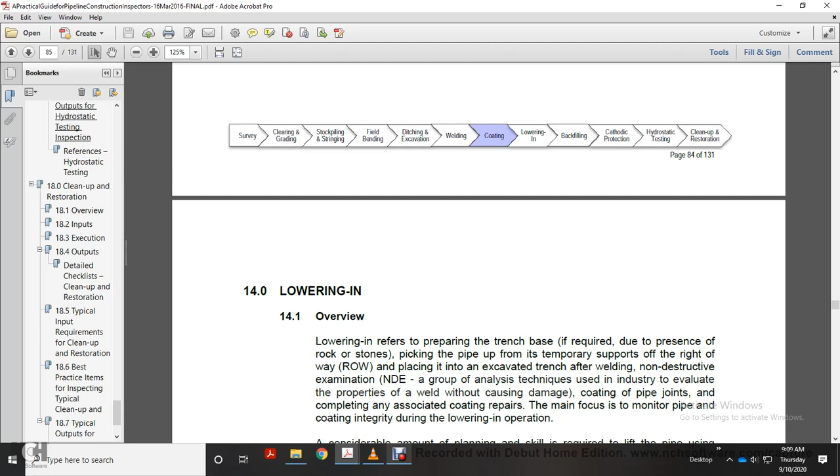Chapter 14, Lowering In. Practical Guide for Pipeline Construction Inspectors.

Overview: Lowering in refers to preparing the trench base if required, picking up the pipe from its temporary supports off the right of way, placing it into an excavated trench after welding.

Non-destructive examination is a group of analysis techniques used in industry to evaluate properties of the weld without causing damage. Coating of the pipe joints includes completing any associated coating repairs, with a main focus on monitoring pipe coating integrity during the lowering operation.

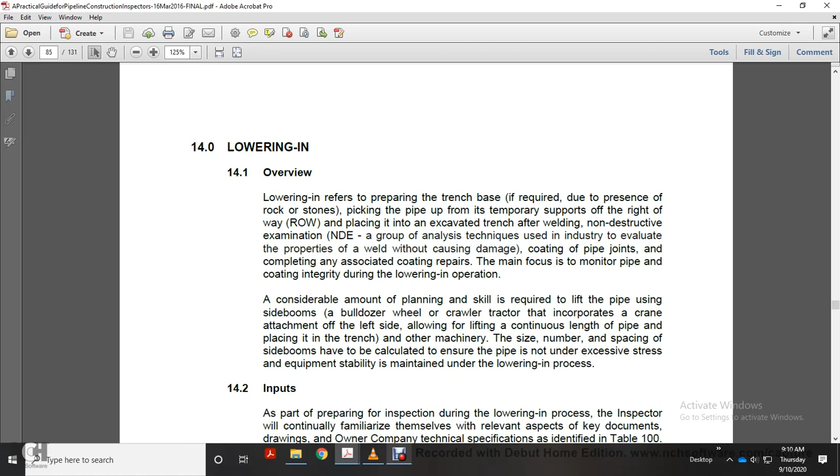Consider the amount of planning and skill required to lift the pipe using side booms. A bulldozer wheel or crawler tractor incorporates a crane attachment on the side, allowing lifting of a continuous length of pipe and placing it in the trench. Other machinery size, number, and spacing of the side booms have been calculated to ensure the pipe does not undergo excessive stress, and equipment stability is maintained during the lowering process.

14.2: As part of the preparation for inspection during the lowering in process, the inspector will continue to familiarize himself with the relevant aspects of the key documents, drawings, and owner company technical specifications identified in Table 100.

Execution: While work is being executed, the inspector is required to monitor workmanship and report on progress on a periodic basis. Typical items the inspector will monitor during the lowering process are identified in a series of checklists, Table 99.

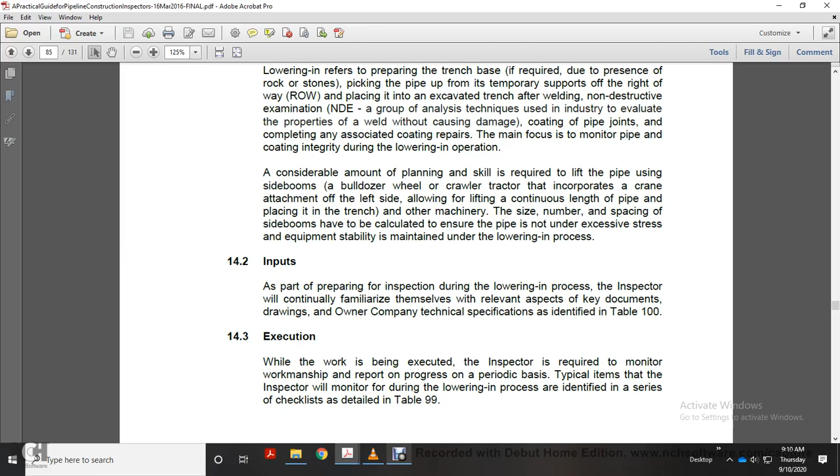Table 99: Monitoring Requirements for Lowering In. Prior to commencement, on a daily basis, ensure the key issues have been identified and addressed in detail.

Safety: monitor operational adherence relevant to the owner company's project-specific safety requirements. Environmental considerations: identify specific items that should be monitored for the lowering in operation, relating to specific owner company project-specific environmental protection plans. Trench base preparation.

Prepare the trench base to ensure the pipe is not damaged when placed into the ditch due to rock, construction debris, or other hazardous trench bottom conditions.

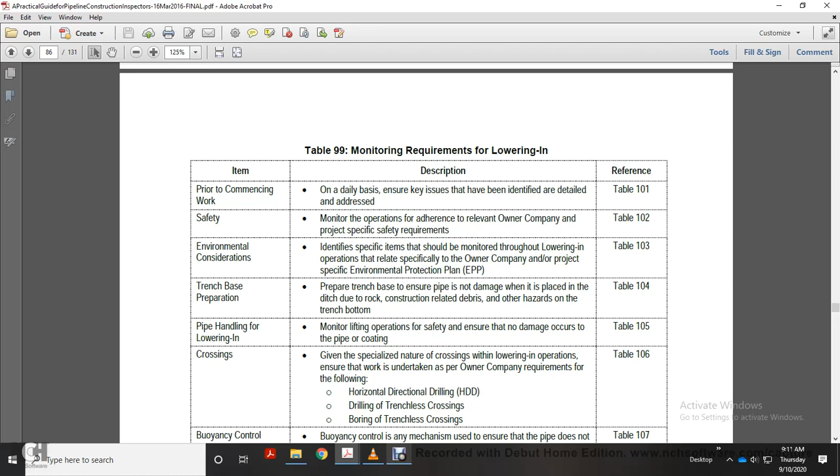Pipe handling and lowering in: monitor the lifting operation for safety, ensuring that no damage occurs to the piping or the coating.

Crossings: given the specialized nature of crossing lowering in operations, ensure work is undertaken per owner company requirements for horizontal directional drilling, trenchless crossings, and boring of trenchless crossings.

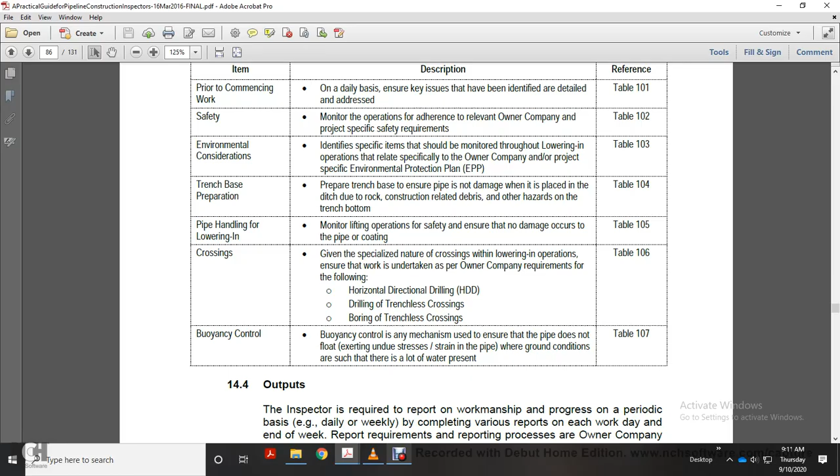Buoyancy control: buoyancy control refers to any mechanism or measure used to ensure the pipe does not float, exerting undue stress or strain, where ground conditions are such that there is a lot of water present.

14.4 Output: Inspectors are required to report workmanship progress on a periodic basis by completing various reports at each work day and at the end of the week.

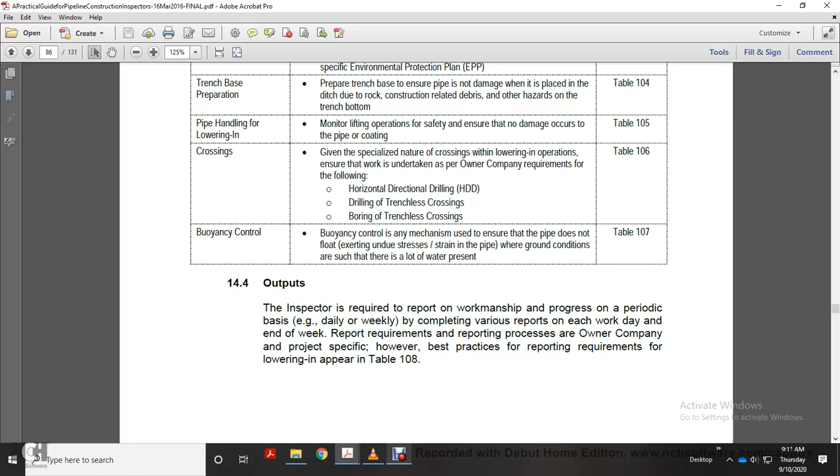Reporting requirements and the reporting process are owner company project-specific. However, the best practices reporting requirements for lowering in appear in Table 108.

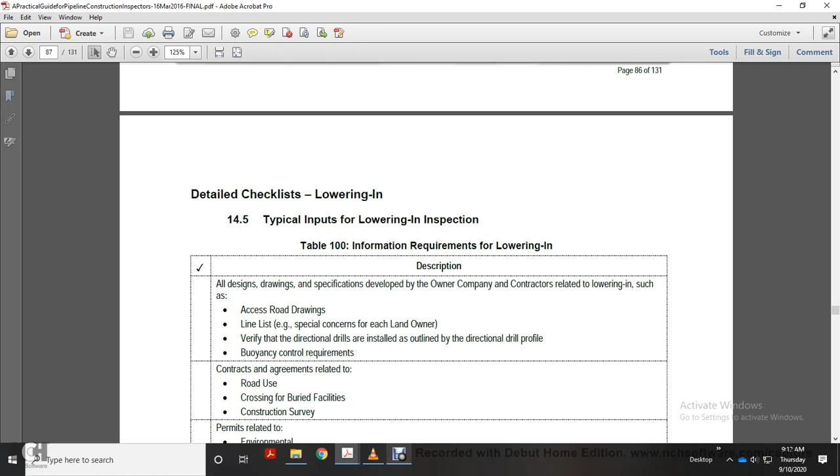Table 100: Information Requirements for Lowering In. All design drawings and specifications developed by the owner company and contractors related to lowering in, such as access road drawings, line lists, verified direction drill installation outlines with direction drill profile, and buoyancy control requirements.

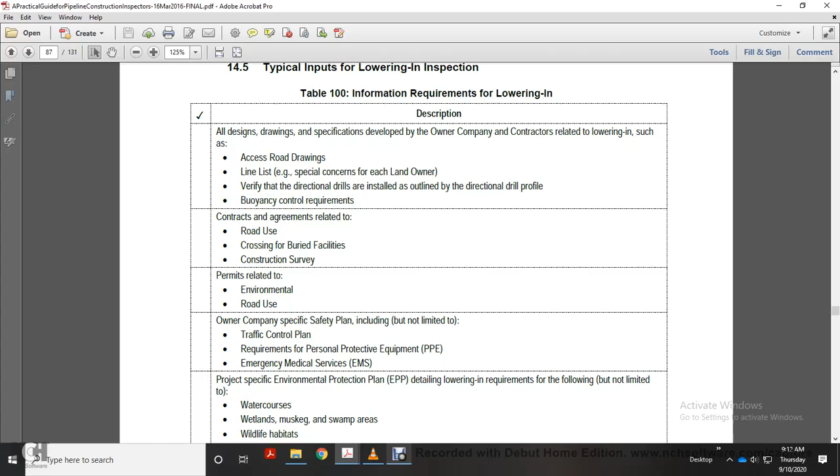Contracts and agreements related to road use, crossings, buried facility construction surveys, and permits related to environmental and road use. Owner company safety plans include but are not limited to traffic plan requirements, personal protective equipment, and emergency medical services. Project environmental protection plans detail lowering in requirements for, but not limited to, watercourses, wetlands, muskeg, swamp areas, wildlife habitats, and migratory routes.

Other project-specific plans may include fire prevention and fire fighting. The lowering plan identifies the type and number of lifting and hoisting equipment required, and the number and specific roles of workers to be on site to lower the pipe into the trench, including the lift plan, relevant contingency plan, and return of HDD.

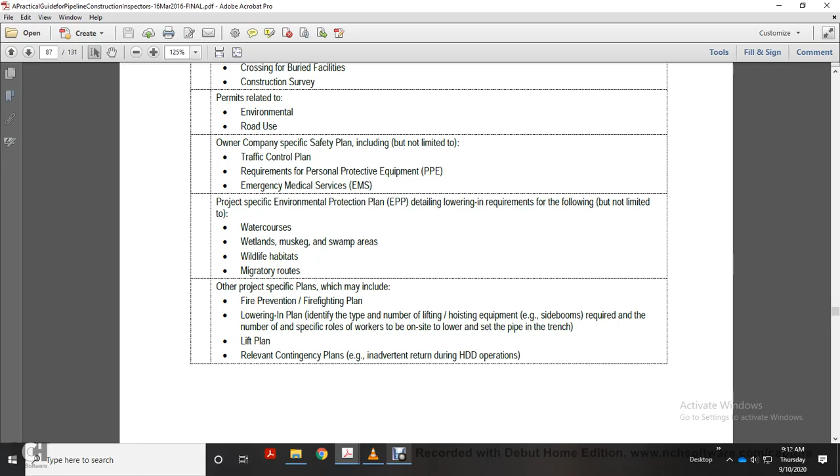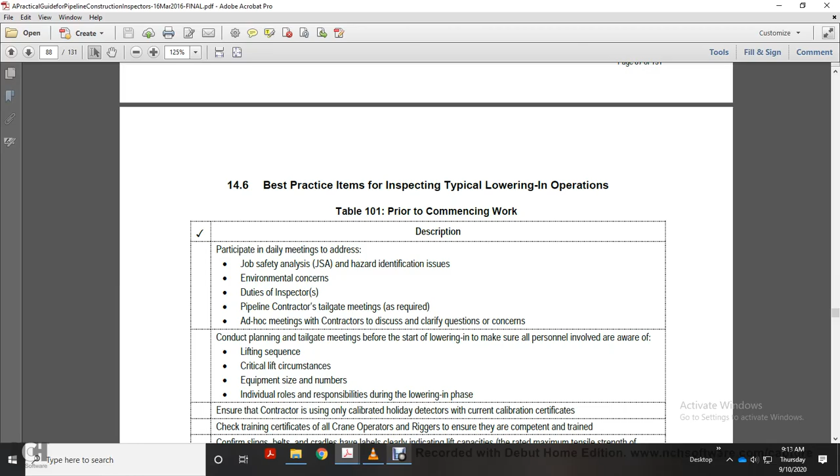Operations: prior to commencement of work, participate in daily meetings covering job safety analysis, hazard mitigation, and environmental concerns. Duties include inspector and pipeline contractor tailgate meetings as required, ad hoc meetings where contractors discuss and clarify questions and concerns, and conducting planning or tailgate meetings before starting lowering in, making sure all personnel involved are aware of the lifting sequence, critical lifting circumstances, quantity, and individual roles and responsibilities.

During the lowering phase, ensure contractors only use calibrated holiday detectors with current calibration certificates, and check training certificates with all crane operators and riggers to ensure that they are competent and trained.

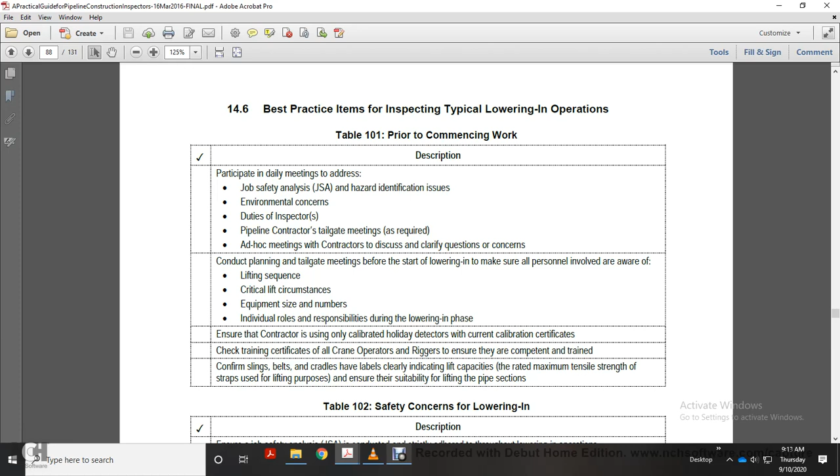Confirm slings, belts, and cradles have been labeled clearly, indicating lifting capacities related to maximum tensile strength. Straps used for lifting purposes must ensure suitability for lifting the pipe section.

Table 102, Safety Concerns, Lowering In. Ensure job safety analysis is conducted and strictly adhered to throughout the lowering-in operation, and updated as required.

Ensure side boom operators use spotters when traversing under power lines due to overhead hazard. Ensure no personnel are ever allowed between the pipe and the trench wall, which could result in a pinch point safety hazard.

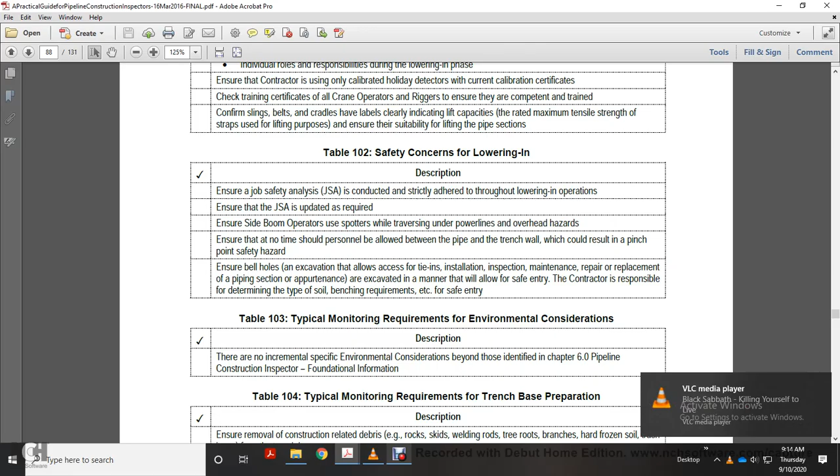Ensure bell holes for tie-ins, installation, inspection, maintenance, repair, and replacement of piping sections are excavated in a manner that allows safe entry. Contractors are responsible for determining soil type, bench requirements, and other factors for safe entry.

Table 103, typical monitoring requirements, environmental consideration. No incremental specific environmental considerations, beyond those identified in Chapter 6.0 of the Pipeline Construction Inspector Foundational Information.

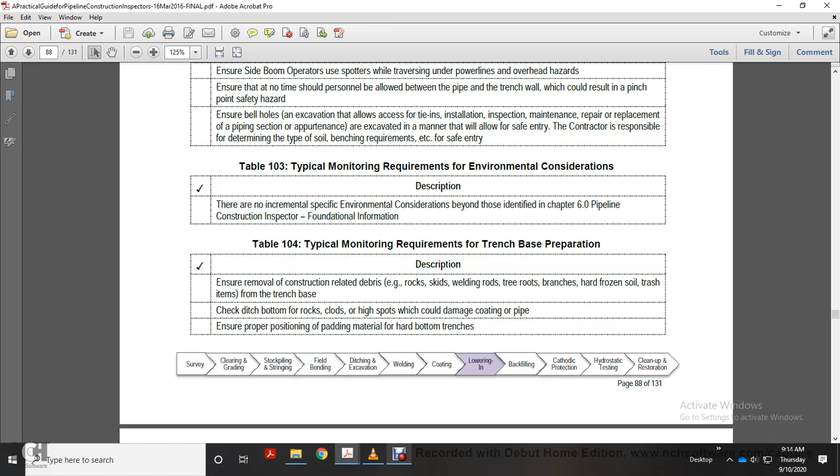Table 104, typical monitoring requirements, trench base preparation. Ensure removal of construction-related debris: rock, skid, welding rods, tree roots, branches, hard frozen soil, trench trash, items from the trench base. Check ditch bottom for rocks, clods, high spots that could damage the pipe coating. Ensure proper padding material is positioned for hard bottom trenches.

Ensure contractor refers to contract documents appropriate to drawing specifications and proceeds with padding and support material to shore up the underside of the pipe properly with distributed loading, typically sand or foam pillows. Ensure adequate spacing between paddings so they do not split or overly compress, maintaining specified padding thickness.

Ensure foam boxes are installed in accordance with design documents to rest on undisturbed soil. Ensure rock shield coating and sand padding are installed where harder rock matter is used as backfill material. Ensure drain tiles are pre-located per alignment drawings.

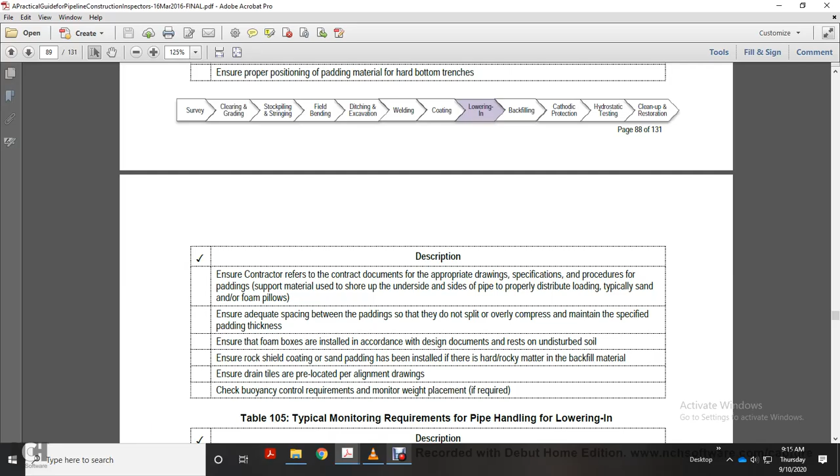Check buoyancy control requirements for monitoring weight placement are required. Table 105, typical monitoring, pipe handling for lowering-in.

Ensure side booms are positioned in conformance with the pre-approved lowering-in plan procedure. Check additional lowering-in cradles, roller belts, and slings. Check that end caps are installed on section ends.

Check that the pipe trench is de-watered and drained as warranted before lowering in the pipe, to ensure the pipe will not float on the trench base. Check connection and cathodic protection test lead cables were installed.

Ensure pipeline is never lowered until all weld repairs have been made and girth weld protection applied and tested. Ensure the pipe is not overstressed during lowering operations by limiting side boom spacing to less than or equal to the specified lowering plan.

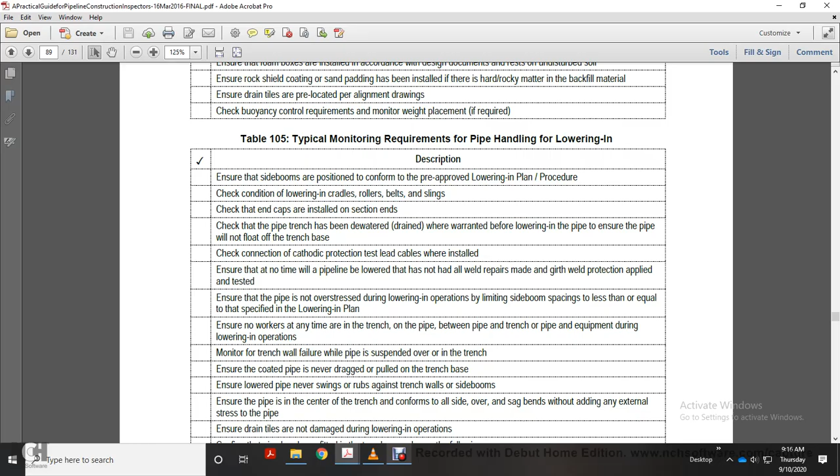Ensure no workers are in the trench between the pipe and equipment during lowering-in operations. Monitor for trench wall failure while the pipe is suspended over the trench.

Ensure the coated pipe is never dragged or pulled along the trench base. Ensure the lowered pipe never swings or rubs against the trench walls or side booms.

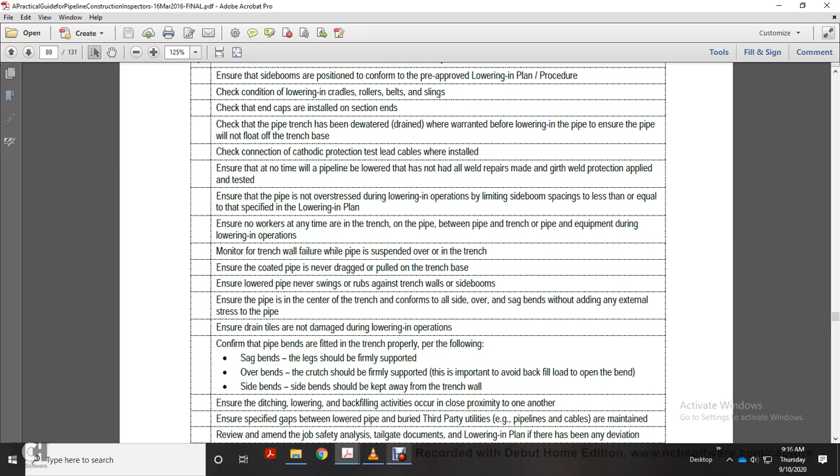Ensure the pipe at the center of the trench conforms to all side, over, and sag bends without adding external stress on the pipe. Ensure drain tiles are not damaged during the lowering-in operation.

Confirm pipe bends are fitted in the trench properly as follows: for sag bends, the legs should be firmly supported; for over bends, the crutch should be firmly supported.

It is important to avoid backfilling over an open bend. Side bends should be kept away from the trench wall.

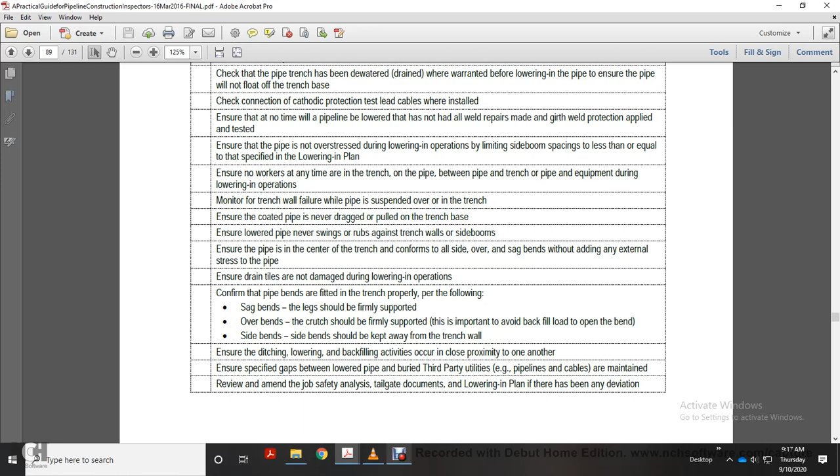Ensure ditch lowering and backfilling activities occur in close proximity to one another. Ensure specified gaps between the lowered pipe and buried third-party utilities are maintained. Review and amend the job safety analysis, tailgate documents, and lowering-in plan if there is any deviation.

For horizontal directional drilling, confirm a third-party contractor will develop the preliminary lifting requirements based on the entry and exit angle of the horizontal directional drilling, length, wall thickness, and weight of the pipe section.

Confirm the owner company engineering department will assist in approving the horizontal directional drill design before lifting commences. Ensure the lifting plan includes equipment and manpower requirements, as well as anticipated risk and mitigation. Upon review and acknowledgment of the lifting plan, the owner company will forward it to the contractor.

Ensure the contractor has an approved lifting plan in place, with no deviations in case the lifting plan cannot be used. Contact the design engineer, obtain owner company approval in advance before commencement of work. Confirm only qualified, certified operators are used to operate lifting equipment.

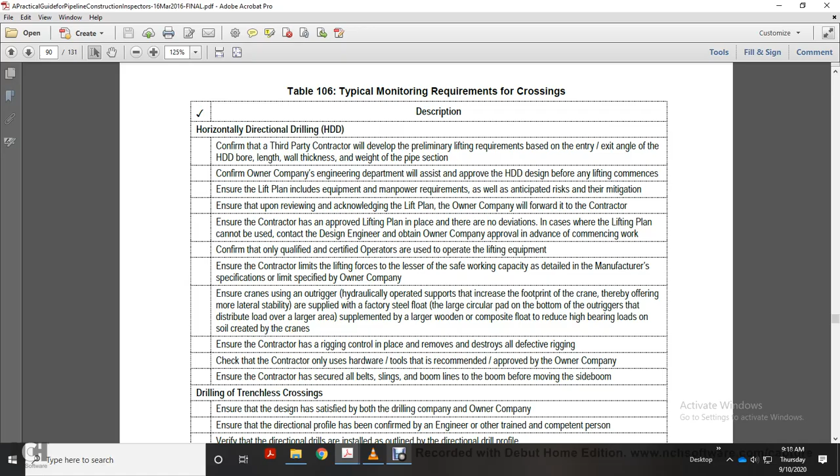Ensure the contractor limits lifting forces to less than safe working capacity as detailed in manufacturer specifications approved by the owner company. Ensure cranes use hydraulically operated outriggers to increase the footprint of the crane, offering more lateral stability, and are supplied with a factory steel float or large circular pad on the bottom of the outriggers to distribute load over a large area, supplemented by a large wooden or composite float to reduce high bearing loads on the soil created by the crane.

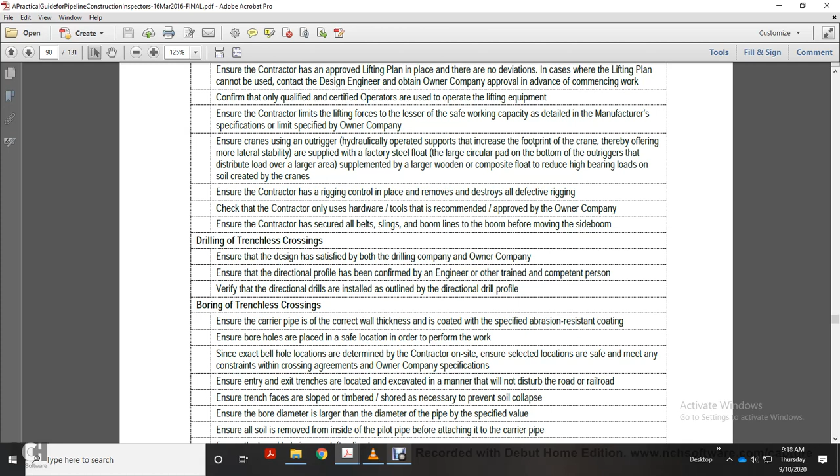Ensure the contractor's rigging control plan removes and destroys defective rigging. Check that the contractor only uses hardware tools recommended and approved by the owner company. Ensure the contractor has secured all belt slings and boom lines to the boom before moving the side boom.

For drilling of trenchless crossings, ensure that the design is satisfied with the drilling company and with the owner's company, and that the directional profile has been confirmed with the engineer or other trained competent person. Verify the directional drills are installed in line with the directional drill profile.

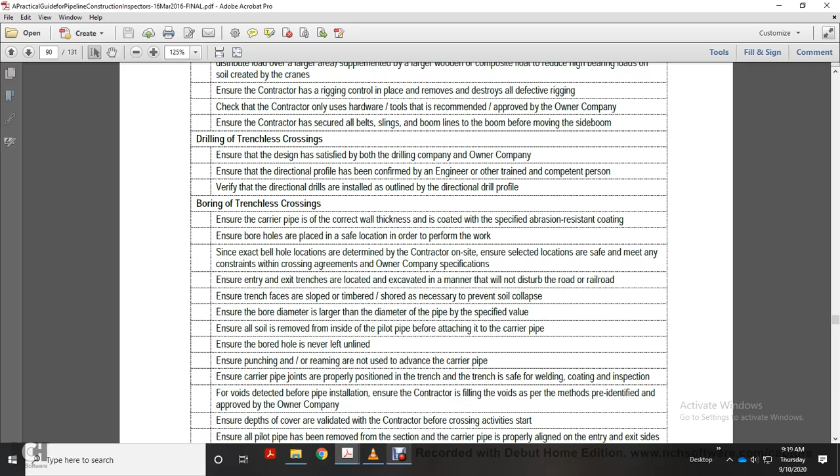For boring trenchless crossings, ensure that the carrier pipe has the correct wall thickness and is coated with the specified abrasion resistant coating. Ensure bore holes are placed in a safe location in order to perform work. Since an exact bell hole location is determined by the contractor on site, ensure that the selected locations are safe and meet any constraints with crossing agreements per the owner company specification.

Ensure entry and exit trenches are located and excavated in a manner that will not disturb the road or railroad. Ensure trench faces are sloped and timbered, shored as necessary to prevent soil collapse. Ensure bore diameter is larger than the pipe diameter by the specified value.

Ensure all soil is removed from the inside of the pilot pipe before attaching the carrier pipe. Ensure bored holes are never left unlined. Ensure punching and reaming are not used to advance the carrier pipe.

Ensure carrier pipe joints are properly positioned in the trench, that the trench is safe for welding, coating, and inspection, and for coating and inspection. For voids detected before pipe installation, ensure the contractor fills the voids using methods prior identified and approved by the owner company.

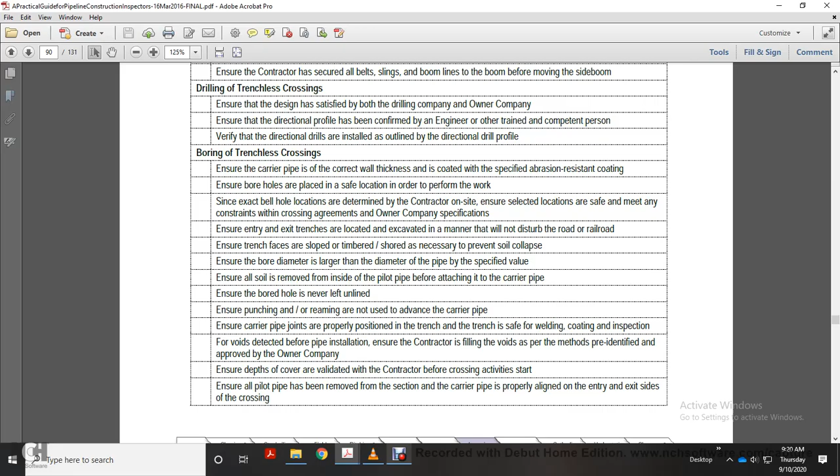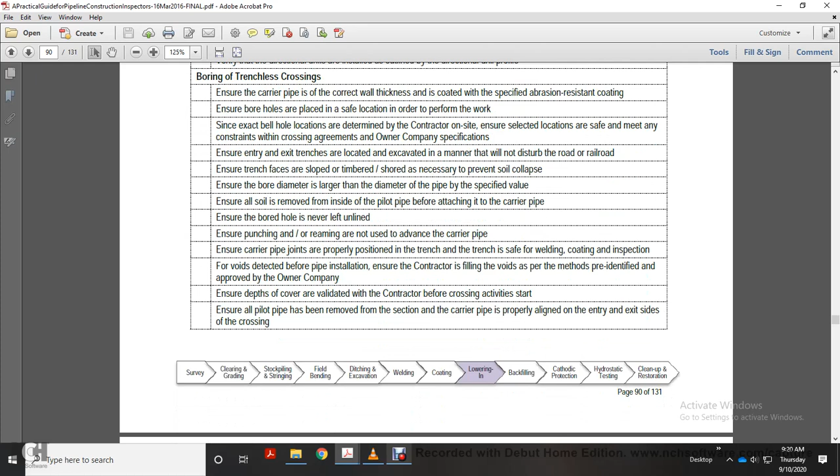Ensure depth of cover is validated with the contractor before crossing activities start. Ensure all pilot pipe has been removed from the section, and that the carrier pipe is properly aligned on the entry and exit sides of the crossing.

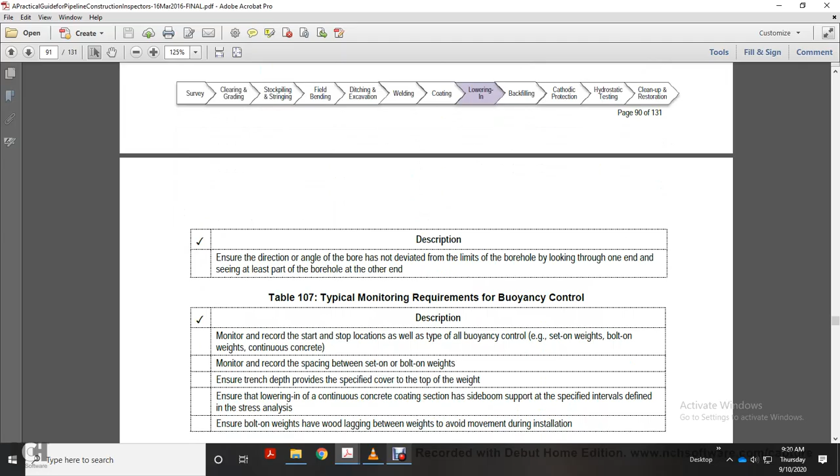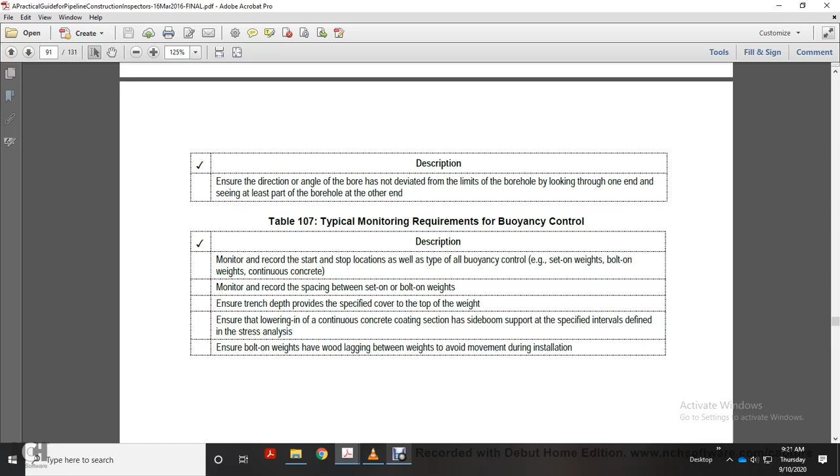Table 107: typical monitoring requirements for buoyancy control. Monitor and record the starting and stop locations, as well as the type of all buoyancy control such as set-on weights, bolt-on weights, and continuous concrete. Monitor and record the space between set-on and bolted-on weights. Ensure trench depth provides specified cover over the top of the weight. Ensure lowering of continuous concrete coating sections use side boom support at specified intervals as defined in the stress analysis. Ensure bolt-on weights have wood lagging between weights to avoid movement during installation.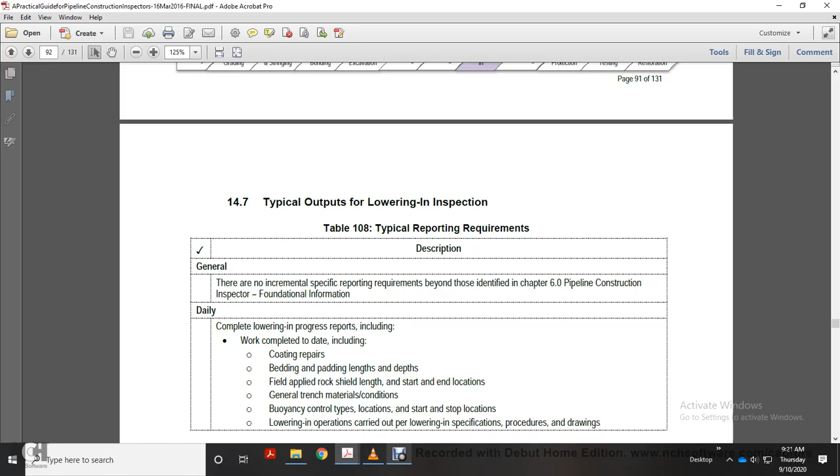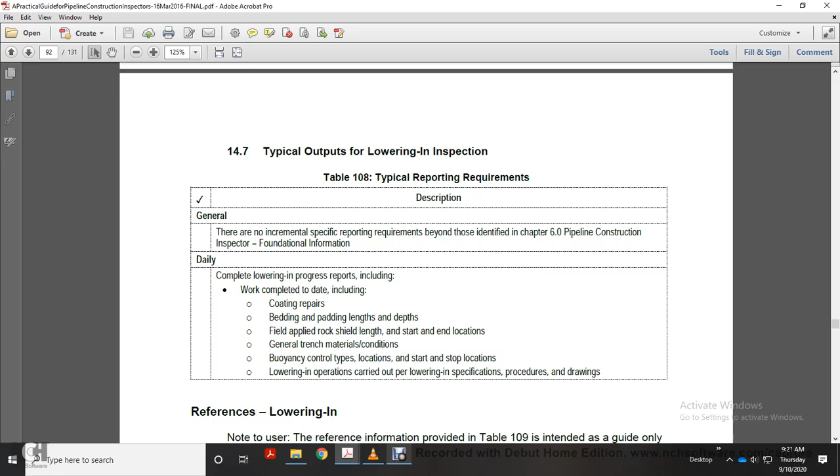Pipeline construction inspector fundamentals for installation. Complete a lowering in progress report that includes work completed to date, including coating repairs, blending, bedding, padding lengths and depths, field applied rock shield length, start and end locations, general trench material conditions, buoyancy control types, locations, start and stop locations, and confirm lowering operations were carried out per the lowering-in specification, procedure, and drawing.

For reference on lowering in, note that each reference listed in Table 109 is intended as a guide only to the extent of the document's nature. As updates occur frequently, it remains the responsibility of the user to ensure the correct, most current documents are referenced as appropriate.

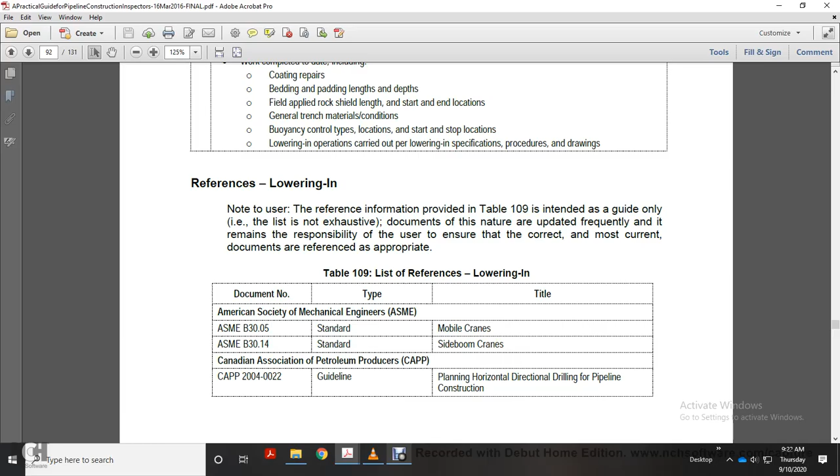References include the American Society of Mechanical Engineers B30.05 mobile cranes and B30.14 side boom cranes, the Canadian Association of Petroleum Producers CAPP 2004-0022 guideline for horizontal directional drilling for pipeline construction, and Chapter 15, backfilling.